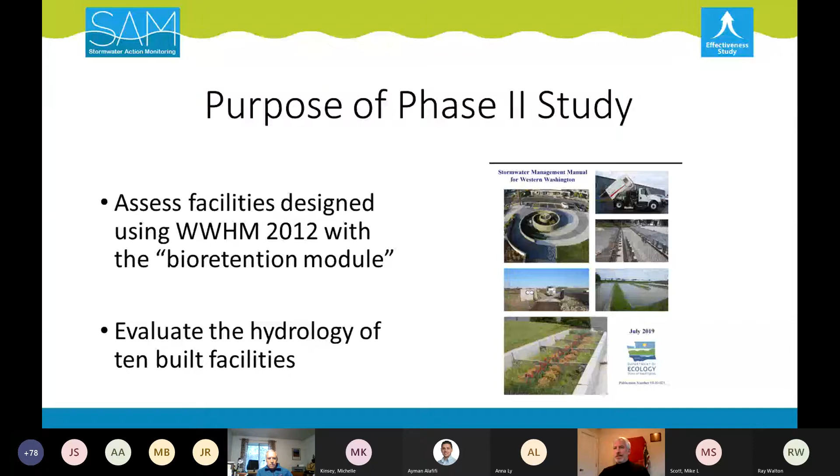The idea was to evaluate the hydrology of 10 built facilities. In other words, how well do constructed bioretention facilities perform compared to their design models? Many of you, I'm sure, are intimately involved in designing and modeling these facilities. And what conditions may be causing differences between the actual performance and model performance?

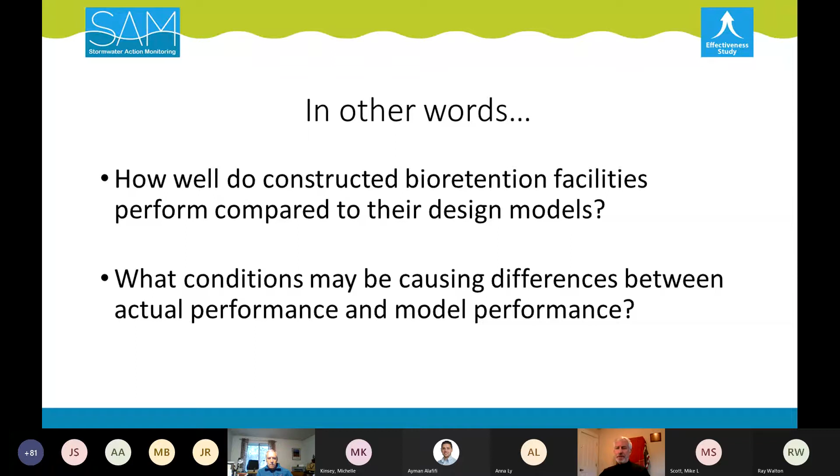As Phase 2 might suggest, there was a Phase 1. The first 10 in Phase 1 were not designed with WWHM2012, so they didn't use the bioretention module, and they were generally older. The second 10 were in fact designed with 2012, and of course were only recently built.

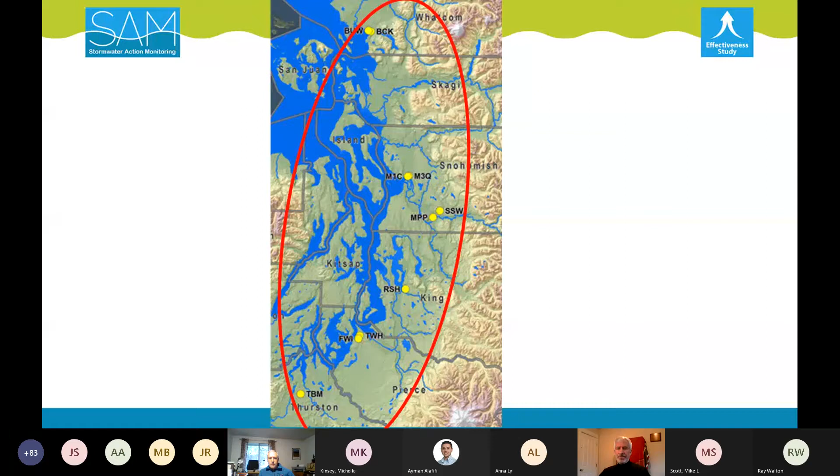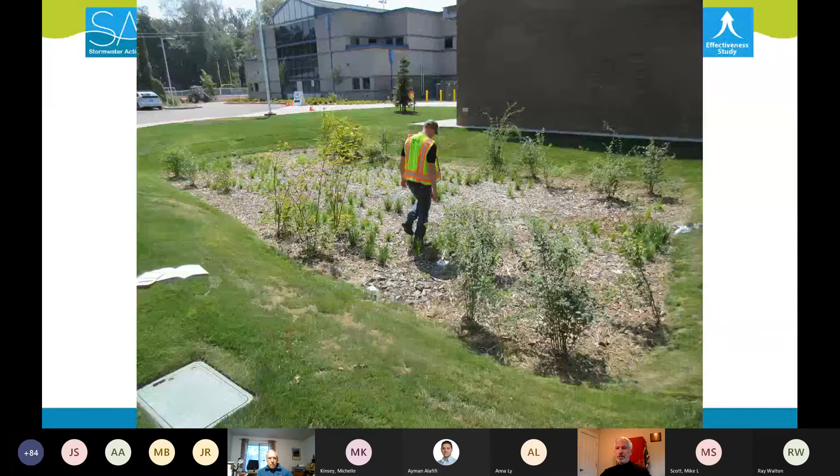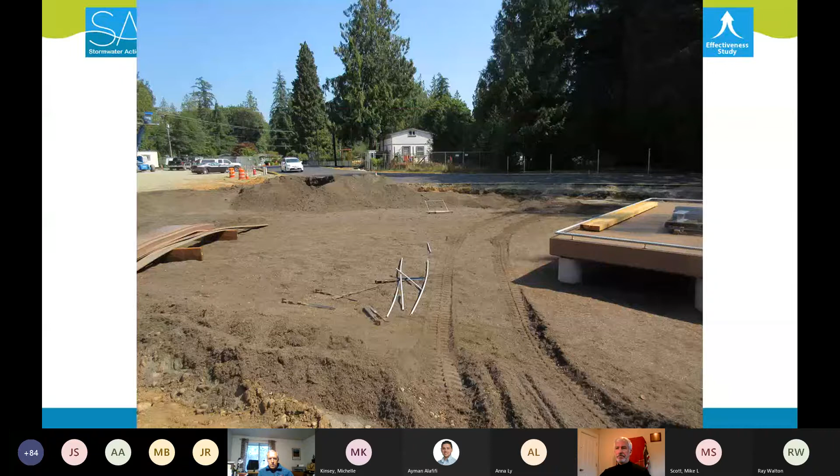There's one in Marysville that was unique in that behind it, adjacent to it, was tidal channels beyond the cyclone fencing there, and the groundwater monitoring saw some fluctuation as a result of that tidal influence, but it did not affect the infiltration performance.

We assessed the various parts of the system: facility dimensions, bioretention soil and subsurface composition, did infiltration tests, measured the hydrology, and categorized the vegetation between herbaceous and shrub composition. These are all the parts that come together to affect the performance.

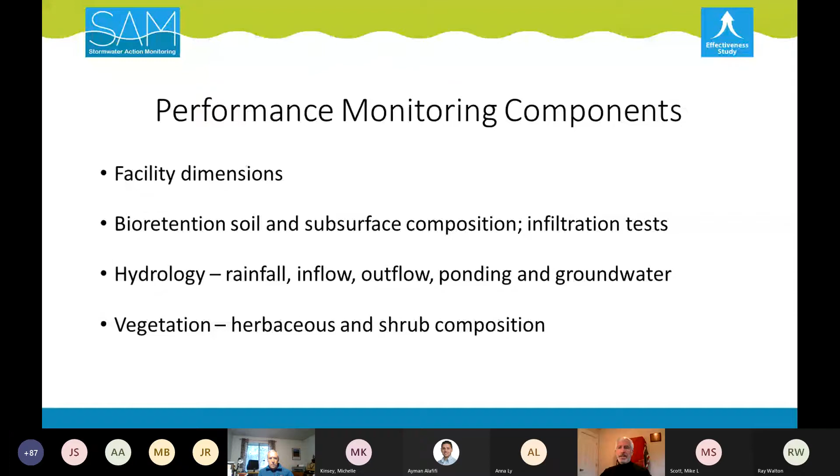Our findings with the dimensions were that 3 facilities had smaller bioretention areas than reported, and 6 of the facilities had a very small ratio of bioretention area to drainage area.

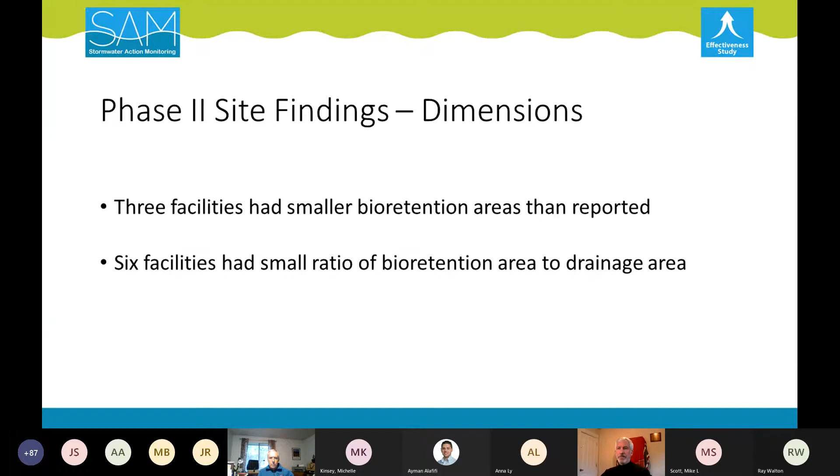Also, for the ratio of bioretention area to basin area, the number of them were small, and granted, a number of those that were small were in fact retrofits with some latitude in the design, that these facilities did not meet the rule of thumb of 5% of the drainage area. But again, that's a rule of thumb, and each situation needs to be assessed individually.

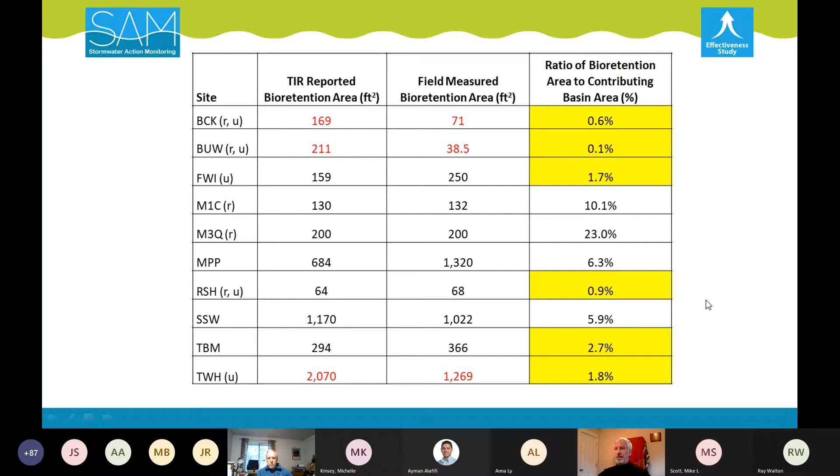Here's the hydrogeologic and geotechnical findings, really covered a wide range of conditions. The bioretention soil texture was generally coarser than the guidelines, and there's a wide range of infiltration rates. And the localized information about the facility hydrogeologic conditions often were not site-specific right where the facility was going to be placed.

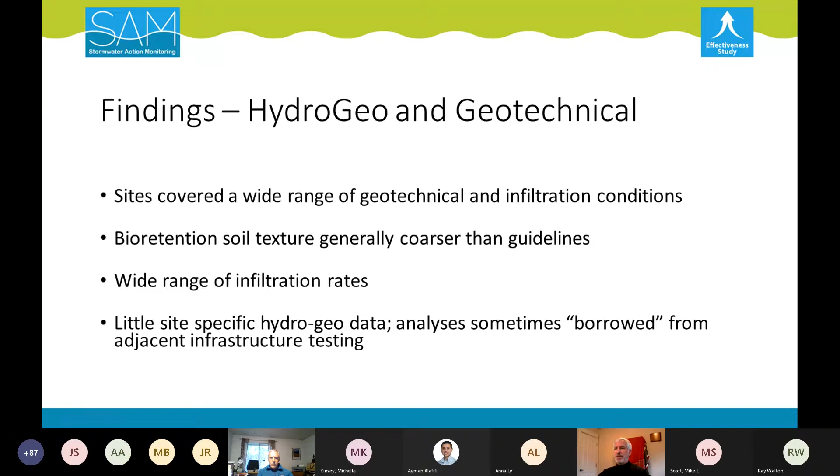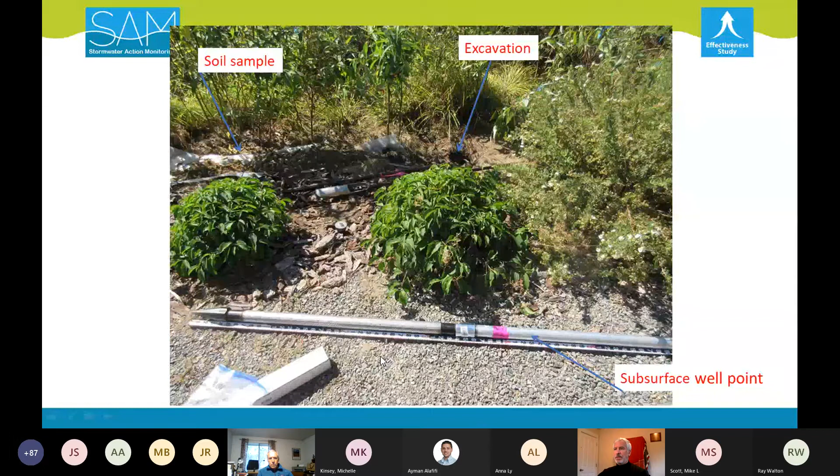Here's an example of how we sampled the soil and the native soil underneath, collecting the soil for a sample, and then placing the well point in the hole with the stage recorder to monitor the groundwater fluctuations.

Here's the result of the media composition, and you're probably familiar with this grain size distribution with the recommended grain size envelope in the dashed area, and each of the sites distribution of the BSM. It's really indicating, this was the first set, that the fines were less than what was recommended in the envelope. Those fines affect the spaces in between larger particle sizes to pass the water through, and so this smaller size greatly affects the infiltration rate.

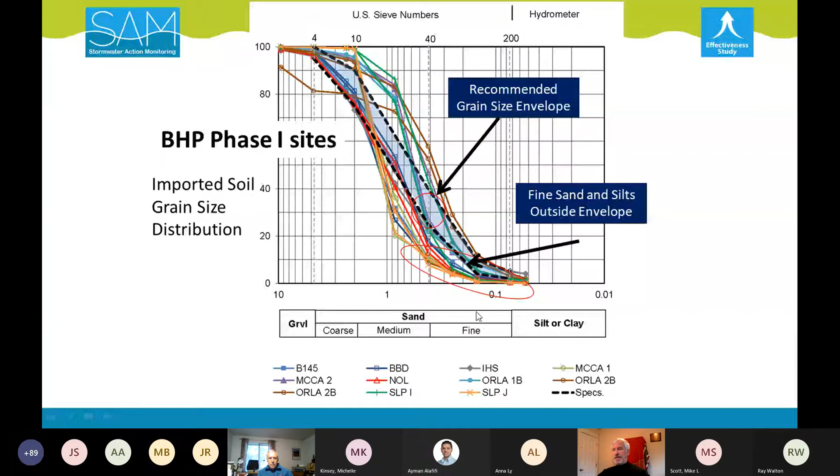Here's the same results from the second set. There were more sites with fine sands and silts within the envelope, but still some not.

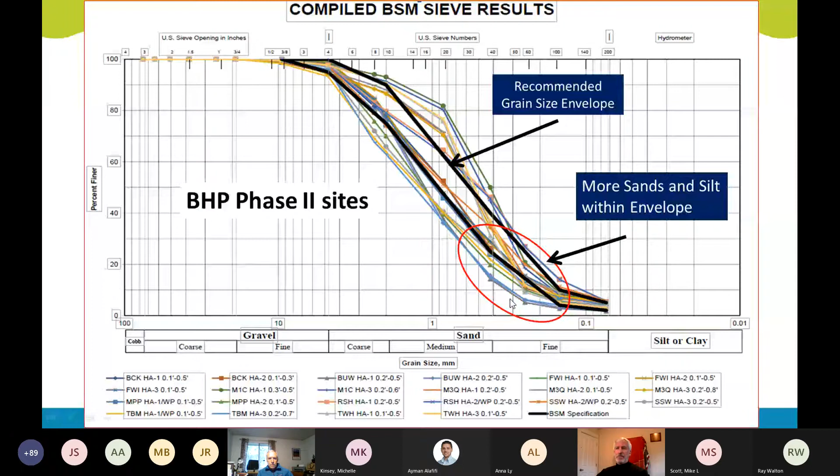And here's how we got the bioretention contact area in the flood test, the full flood test. While the facility is flooding, Jenny and her hydrogeologists are able to calculate, or actually measure, the actual observed bioretention area in the facility.

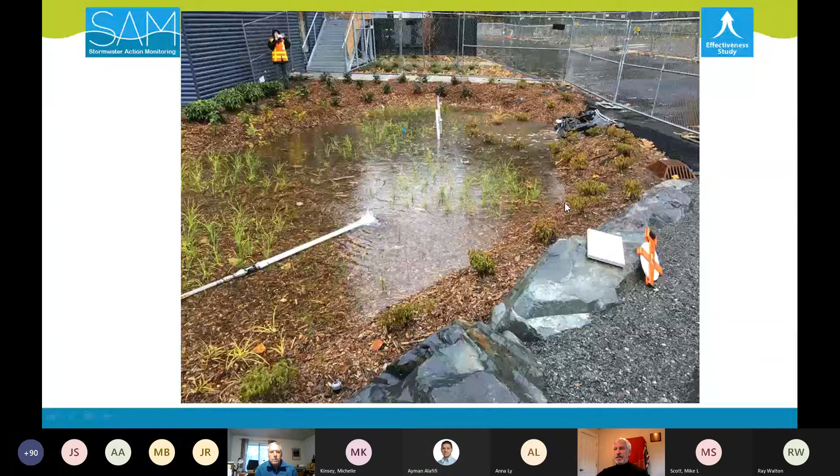Here's another example. The previous one had a grate for the overflow, and the bioretention area would be up to the elevation of the grate. Here's another one that did not have a grate overflow, but actually the edge of the facility, the low point, represented the overflow that allowed any overflow to go out into this field.

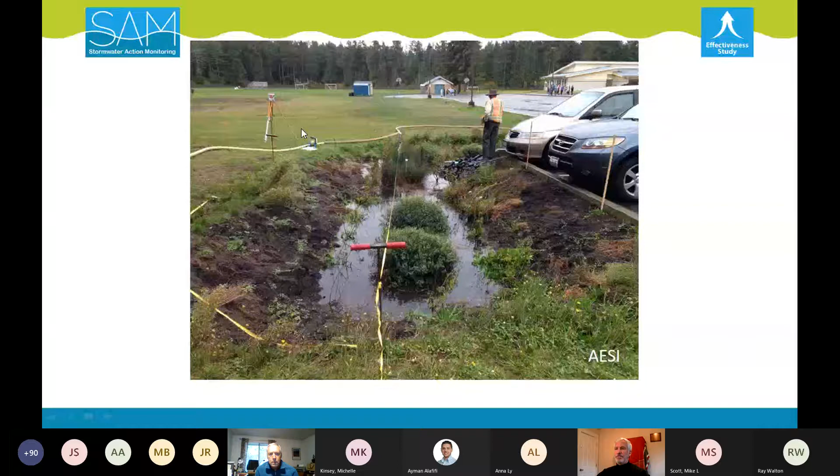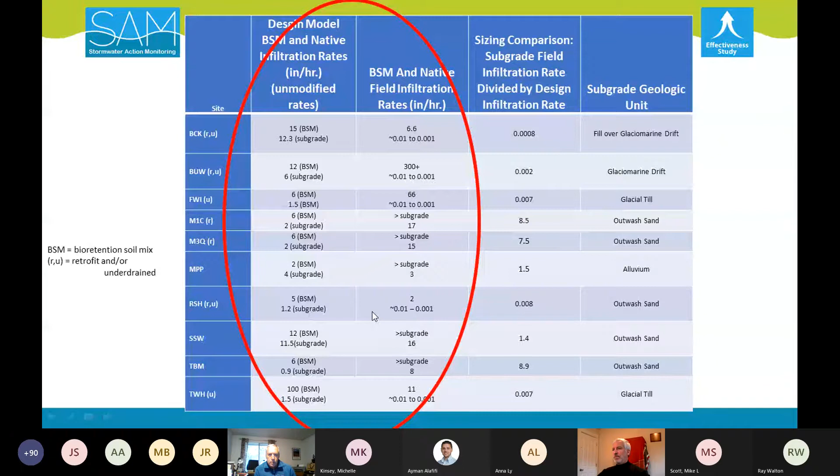With the plants, this turned out to be very informative to do these plant assessments.

Does somebody have a question?

Anne really discovered that the cells were mostly planted with plants that grow in wetland or wet conditions, when in fact the units are incredibly well draining. They should be planted with more dry tolerant plants that can tolerate brief inundations of water, but not if the unit is located on a site that could set water up in the feet of the plant roots.

But this was a common observation in the first set and in the second set, which has considerable ramifications on maintenance going forward for the owners.

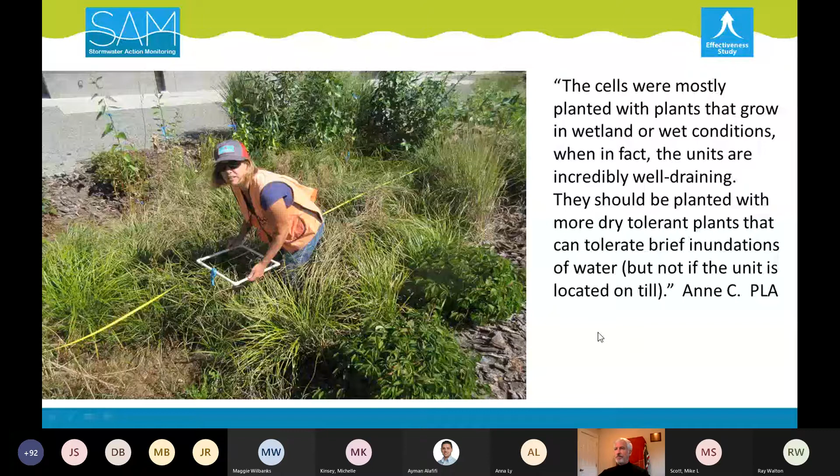So in the vegetation findings, the shrubs did well, herbaceous species less so, and selecting fewer, more successful species will lead to greater survival. There is a recurring issue of plant die-off.

Most interestingly, both for the plants and for hydrologic performance, there was evidence of uneven infiltration resulting in uneven moisture available to the plantings. What we mean by uneven infiltration is that because the infiltration rate of most of these BSMs is fairly high, the infiltration largely happened near the inflows of the facilities, and in some cases rarely, if ever, reached the other end of the facility, with effects on survivability, but also potential bypassing of the distributed infiltration straight to an underdrain. This was one of the more interesting observations we had in both the first 10 and the second 10.

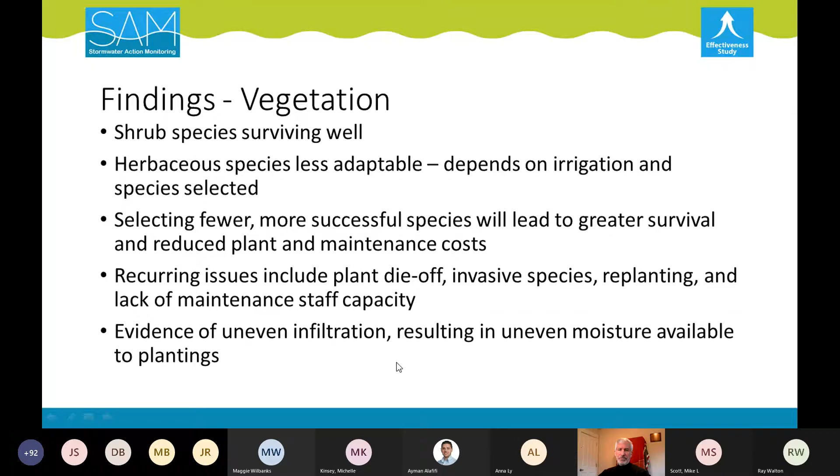Doug is going to be talking about the hydrologic performance. You all know that it's meant to control flow and gain water quality benefits, but needs to be set up correctly.

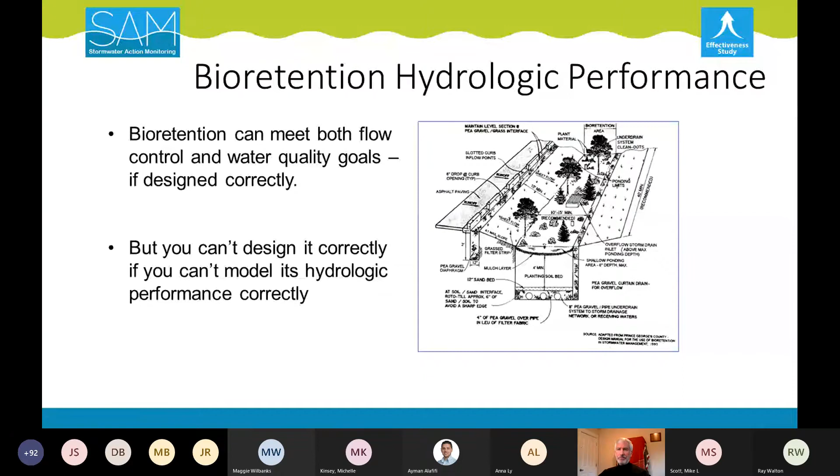In the first 10, there were, without the bioretention module, a number of models used, and it's often not set up properly. In the first 10, the performance of the modeling really was masked by just the size of the facilities, masking design errors or incorrect assumptions.

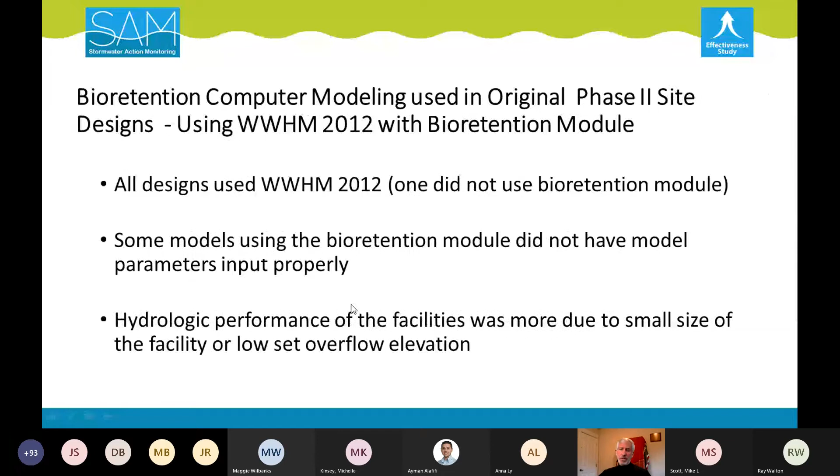The second set, 2012, was used, but in one case the bioretention module for some reason was not. Again, models using the bioretention module did not have model parameters input properly in a number of cases. The hydrologic performance of the facilities was more due to the small size of the facilities or low overflow elevations.

Interestingly, in the first set of 10, none of the facilities overflowed. In the second set of 10, 4 of the facilities overflowed, and each of those were underdrained, which would seem a little counterintuitive, but they were also small or they had low overflow elevations.

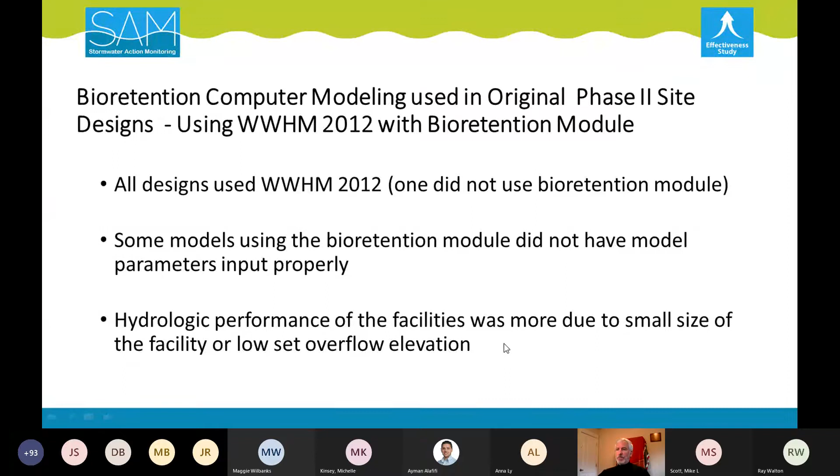For the most part, the model represented what we actually measured in the field quite well. Doug is recommending to ecology that maybe a vegetative litter layer and also increased evaporation rate could improve the performance of the model.

And here's the take home, the simple design recommendations that I think each of you in this engineering audience will really recognize: maintaining a bioretention top area of at least 5%. Again, that's very site specific, and take that with a grain of salt, that kind of rule of thumb is, but we did see a number of the smaller facilities overflowing. Maintain a minimum 6-inch riser height.

One of the facilities had a riser height of about 1 inch, and of course that doesn't gain you very much infiltration area.

Make sure to meet the bioretention soil mix depth and particle size distribution. Again, importantly, specify a planting plan that reflects the relatively dry and well-drained conditions of bioretention facilities, and double check the accuracy and consistency of your bioretention soil media infiltration and native infiltration rates and the associated correction factors. Those are going to have the greatest effect on your model outcomes.

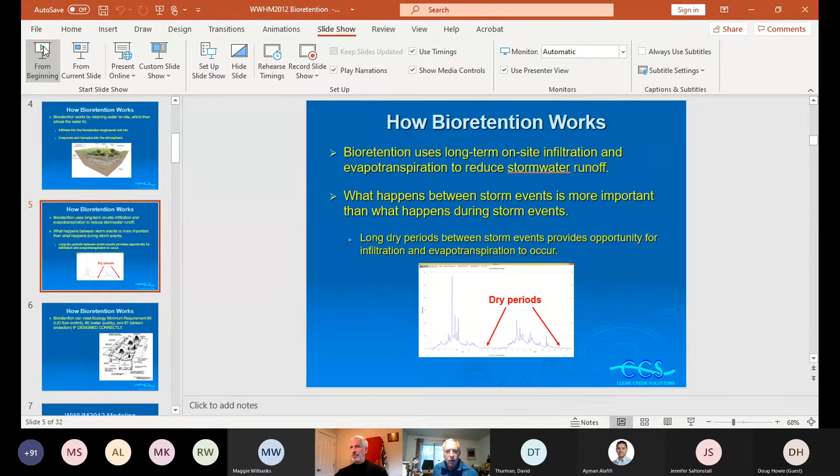Hey Doug, this is Jenny, you're not sharing the presentation. Oh, we're not? Okay, let's see if I can figure out why not. Let me go back here and see what I need to do. So I shared my screen but it didn't come across. Are you sharing your PowerPoint or just that desktop? Well, I thought I was sharing my PowerPoint. So you're not seeing that? Now we are, you're seeing it now? Yep, now we see it. Okay, but it's not on slideshow mode. No, I'm just going to go over to that now. So let me switch back over here. Are we good now? Yes, perfect. Okay, well, I'm glad somebody finally mentioned it. Otherwise I would have continued on my way.

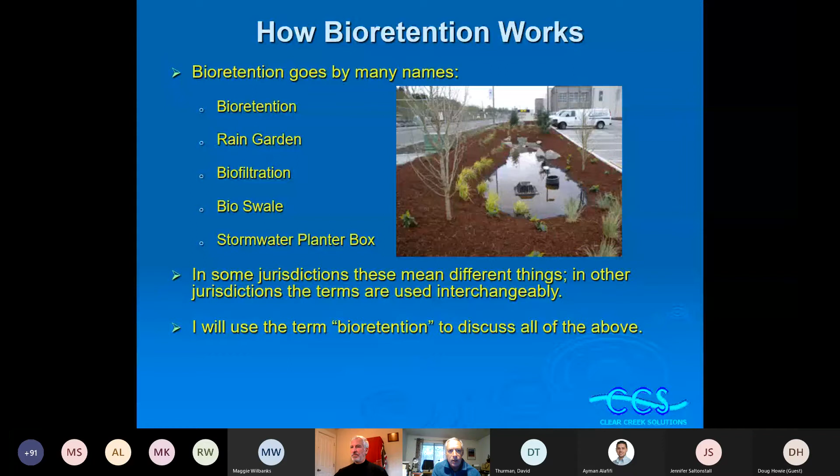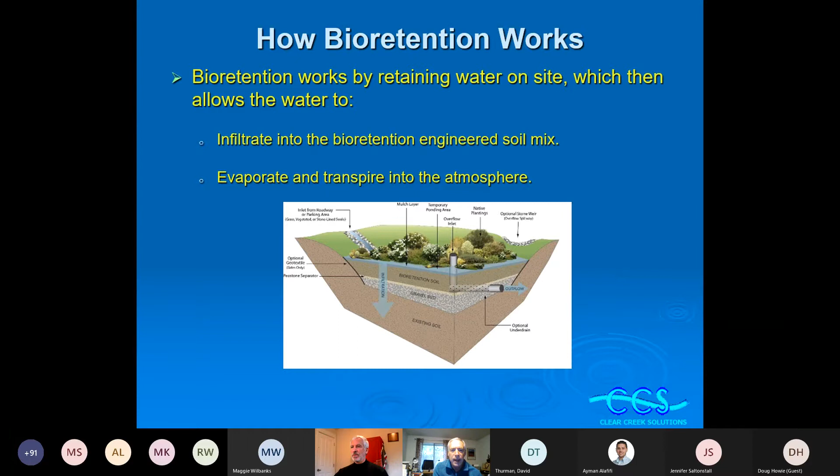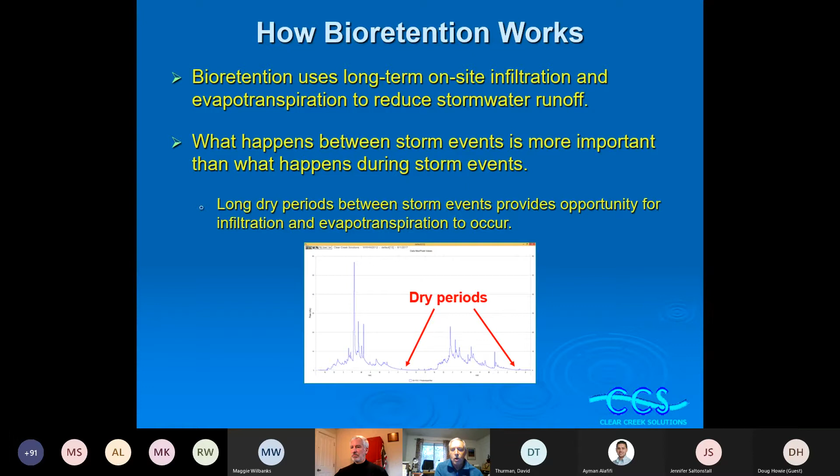So these are the different names for bioretention, just to summarize. Ecology, like I said, has a specific definition of what bioretention is, as opposed to a rain garden. And the water obviously has a variety of options when it gets into a bioretention facility—it can either infiltrate into the soil, go back to the atmosphere, or run off. This is where these dry periods allow water to both infiltrate into the native soil if possible, or go back to the atmosphere through evapotranspiration.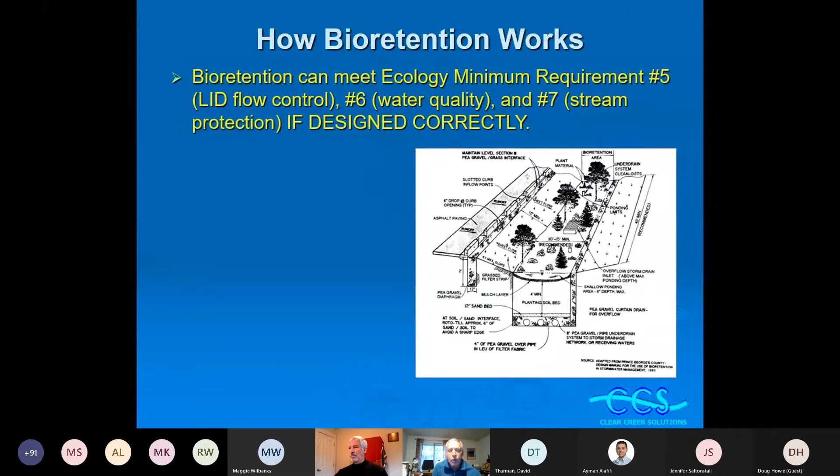So we can do a number of things with bioretention. Ecology has a number of requirements when it comes to stormwater. Minimum requirement number 5 is related to LID facilities and flow control, 6 is water quality, and 7 is stream protection. So you can use bioretention to meet either 1, 2, or all 3 of these requirements, if that is your goal.

Now, the way it works in the model in WWHM is it uses HSPF, which is continuous simulation hydrology. So the Western Washington Hydrology Model is a package that allows the user to easily use HSPF. This means we can model the entire hydrologic cycle over multiple years at a 15-minute time step, and this is what we're doing here with our bioretention facilities. When we did the actual monitoring, we monitored them at a 5-minute time step. We only had about 9 months worth of data, but we were still able to basically model them at that time step, so we have that flexibility.

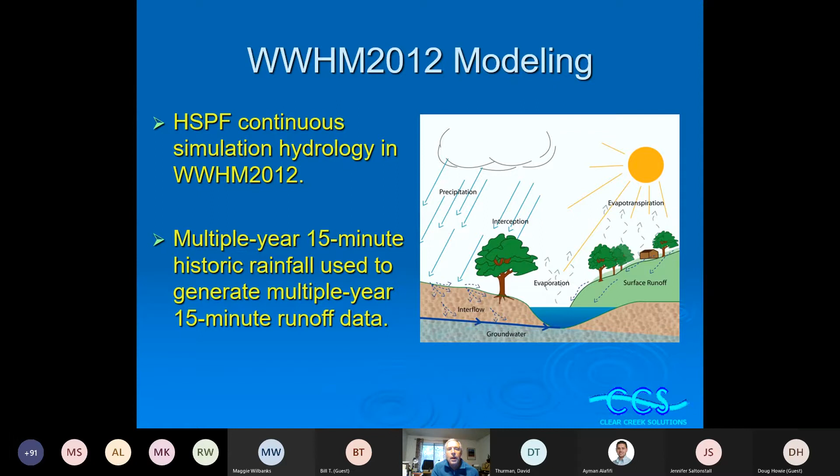And that means that we can basically watch where the water goes through the whole hydrologic cycle.

You have rain on the facility, flow coming in, surface ponding, and you can have surface runoff, and then the water can go through the different layers. We have up to 3 different layers, which can represent the bioretention soil mix, a gravel layer underneath that, and whatever else you may want to have.

You don't have to have 3 layers - you can certainly have less. You have the option of having an underdrain, and you also have the option of having infiltration into the native soil underneath. Now the water's got to go somewhere, so if it can't infiltrate into the native soil, you have to have an underdrain to get rid of it. If you do have infiltration into the native soil, you can still have an underdrain if you want.

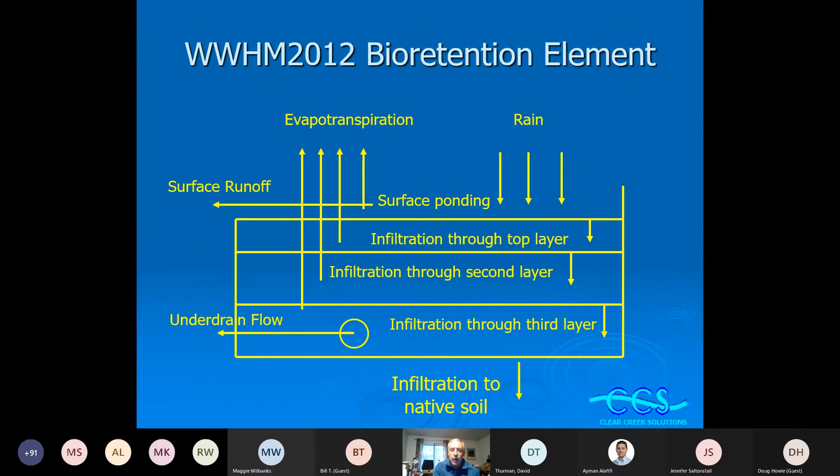So there's a couple things to be aware of. The bioretention area in the model automatically gets rain and evapotranspiration on that surface area, so you don't want to include that area in your drainage that is contributing to it. Ecology has a very specific soil mix layer that is required, and that's set up in the software so that you can do that.

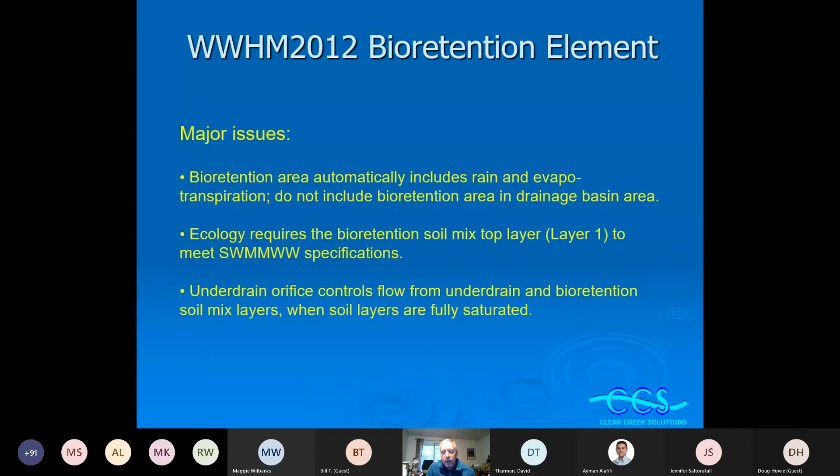And as I mentioned, the underdrain is an option, and if you do have an underdrain, you have the ability to put an orifice control on it to basically control how much of that water, and how quickly it comes out from the underdrain.

This is basically to account for the fact that over the entire life of the facility - let's say you've got a 50-year life for this facility - in time you have the potential for clogging on the surface, which is going to reduce the infiltration rate. So this is a policy decision that the Department of Ecology made in terms of how to deal with that situation.

Now, when it comes to bioretention performance, there's a number of critical factors. I'm just going to quickly go through these. Surface ponding is one. Obviously, if the water coming in can sit on the surface without automatically draining off, you have the ability to store some water, giving it more time to go down through the soil and then out either through an underdrain or to the native soil.

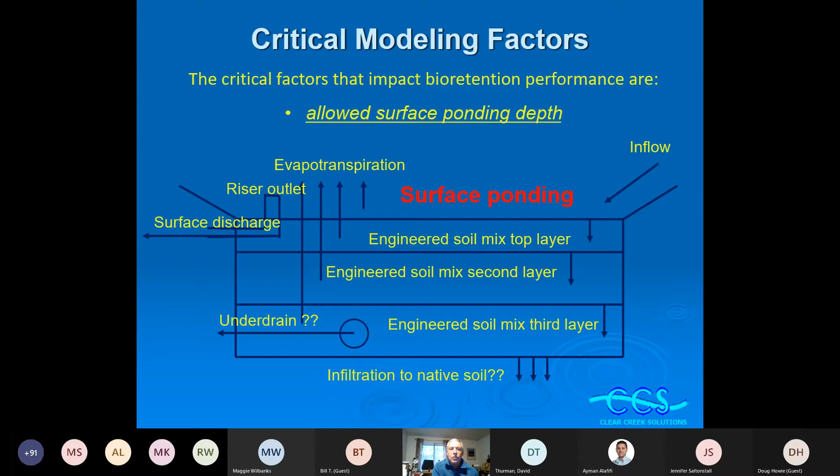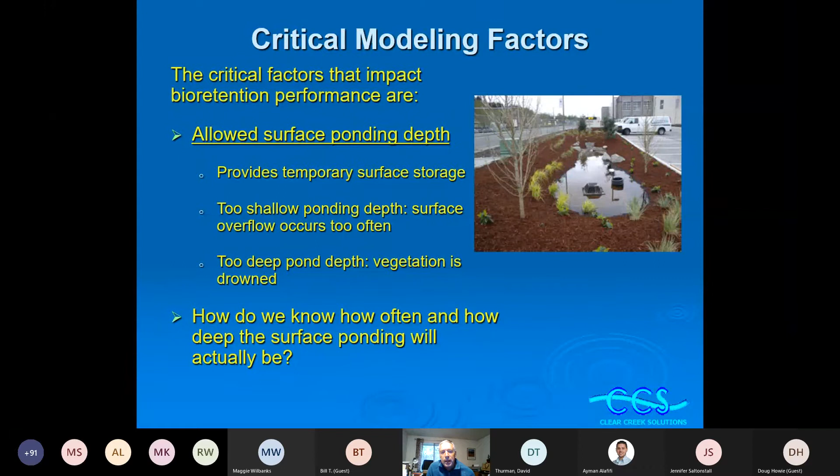So this is where, as Bill was saying, having a 6-inch height of your riser, meaning you can get 6 inches of surface ponding before you actually get surface runoff, is a benefit and something you should keep in mind. If you only have 1 inch, then you're not going to get nearly as much ponding. Surface ponding gives you some temporary surface storage, and obviously you want some storage, but you don't want too much ponding because you don't want to drown out your vegetation. So that's a key consideration.

Another consideration is what type of soil mix you have. Ecology has specific rules for that top layer, which is 18 inches of the bioretention soil mix that Bill mentioned. Below that, you can have a second or third layer, oftentimes a gravel layer underneath, which is primarily used for storage. The user has the ability to specify exactly what these layers are - we give you a lot of flexibility there. The goal is basically to use that engineered soil mix to provide the water quality treatment.

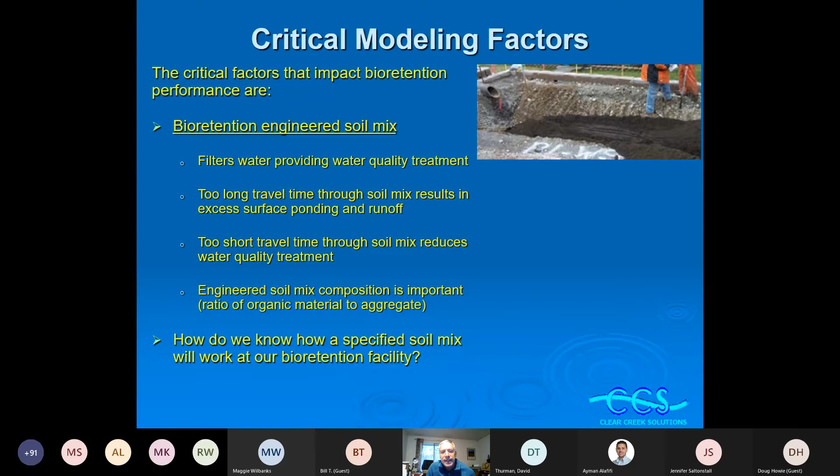So you don't want a mix that prevents the water from draining quickly enough, because then you're going to get more surface ponding and surface runoff. But if it just drains right through like it would through gravel, then you don't get the water quality treatment that you're looking for.

Once the water gets down into that soil, it has to go somewhere. So you have the option of having an underdrain, and if you have one, the water has the ability to exit the soil through that direction. That's a key component.

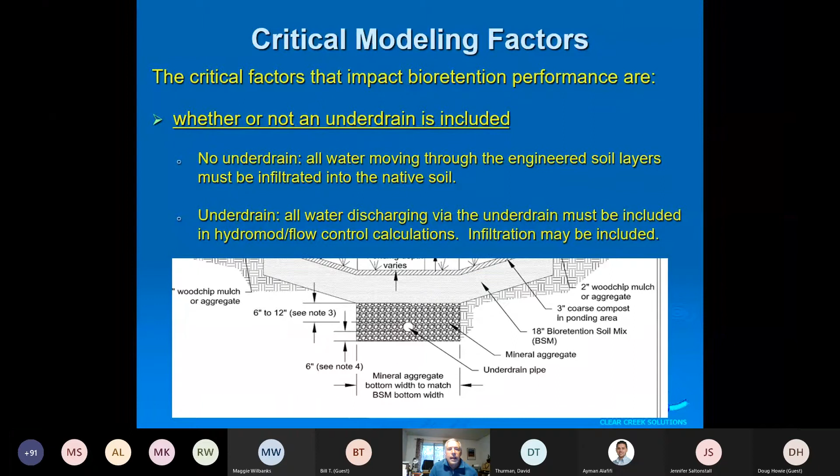There are a couple things you need to take into account in terms of how you place the underdrain, and how quickly that water can be discharged from it. We give you the option of setting the underdrain height to whatever height you want above the bottom of that soil layer, and also whether or not you want an orifice that controls the discharge from that underdrain.

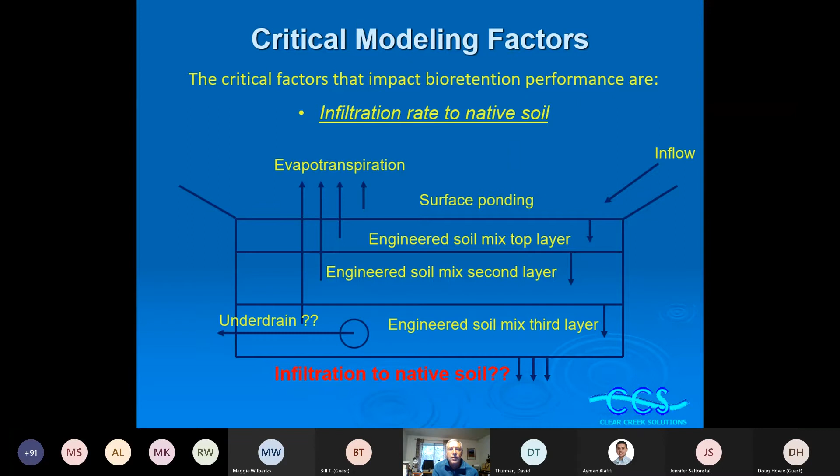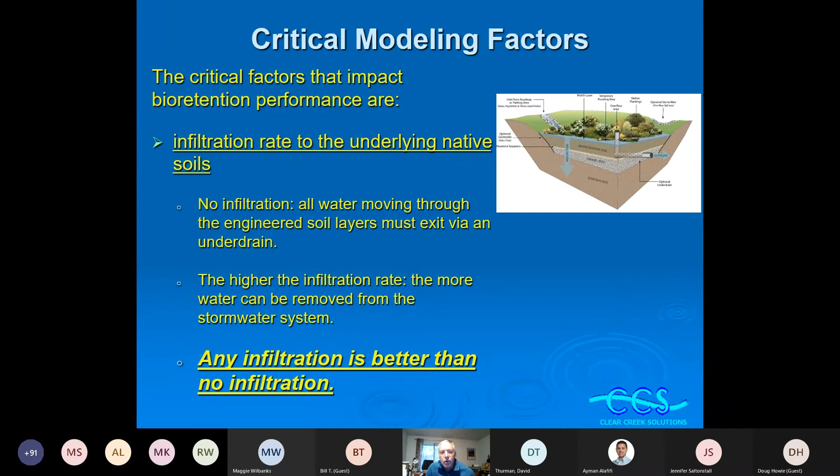And finally, the infiltration into the native soil. If you have the ability to infiltrate into the native soil and it's not going to cause problems, that is certainly a good option, and that depends upon what type of soil you have down there, but it's worth considering and will make a big difference in how well your facility functions. The bottom line is that water has to go somewhere, and if you can infiltrate the native soil, so much the better.

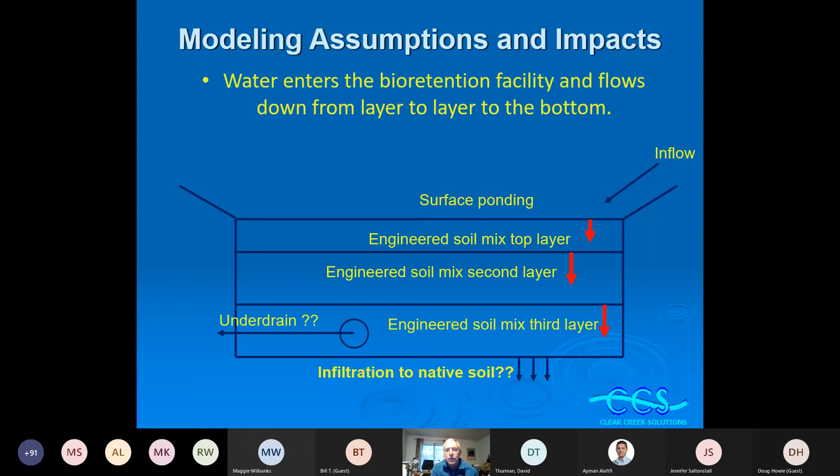In terms of actually how we do the modeling, we do it from a top-down approach. This is all internal in the calculations, you don't have to deal with any of this detail, but just to give you an idea, when the water first is applied onto the soil, we do the calculations based upon the properties of the different layers. Depending upon those properties, the water can move either quickly or slowly through that soil, first into the top layer, then the second layer, and then on down, eventually getting to where it can go out through an underdrain or to the native soil.

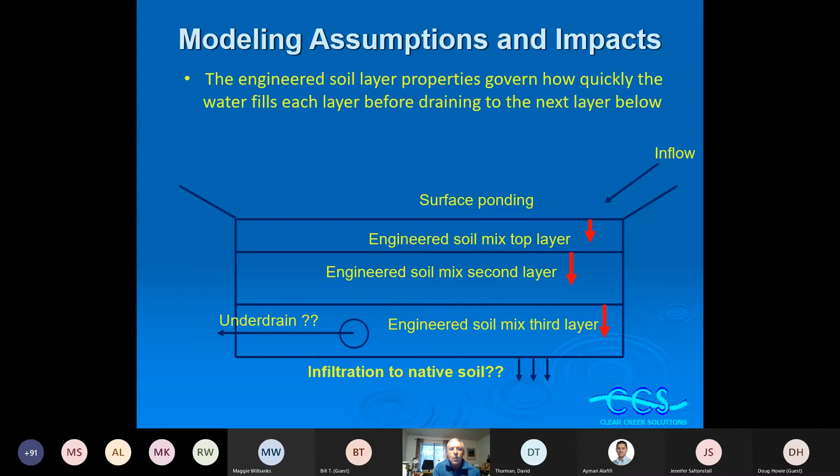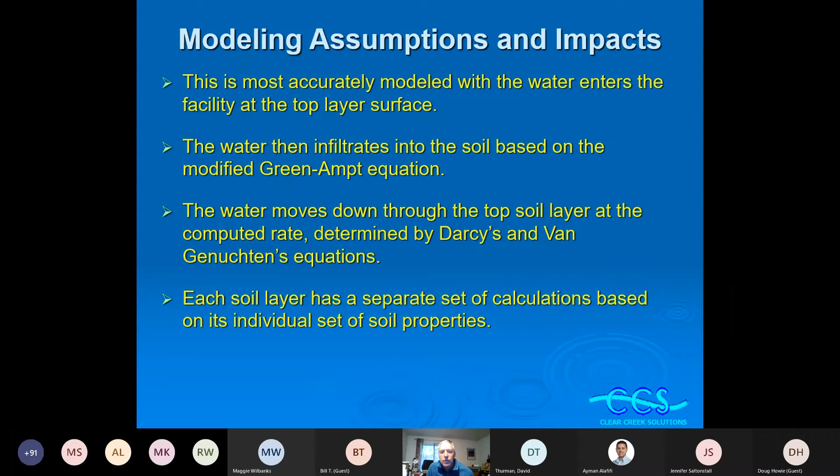So they govern how quickly that water can then move. This is all calculated internally in WWHM based on the Green-Ampt equation, and also using Darcy's and the Van Genuchten equations. Each soil layer has its own separate set of calculations based upon its individual set of soil properties.

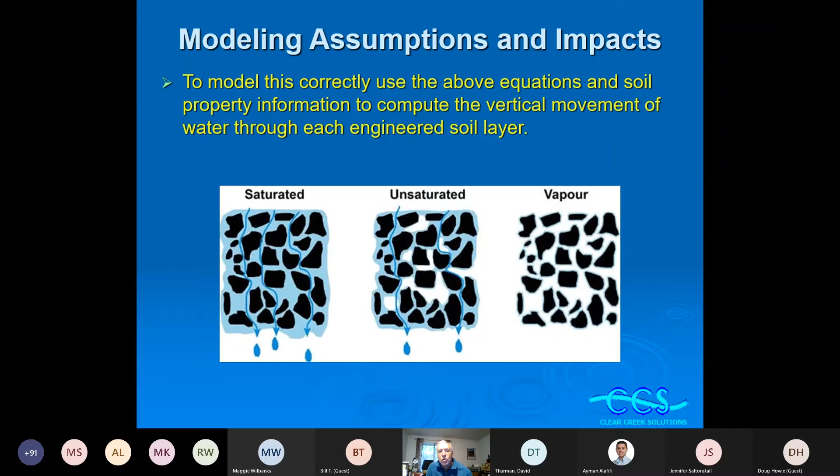What happens in the real world is that when you don't have any water in that soil, you have that vapor condition where basically you have a lot of void space. That's the first place that water will fill up. As it does fill up, eventually when it gets to the saturated point, that's where you actually get water draining from one soil layer to the next. So what we're doing is calculating how quickly that occurs, based upon the type of soil mix that you have and the depth.

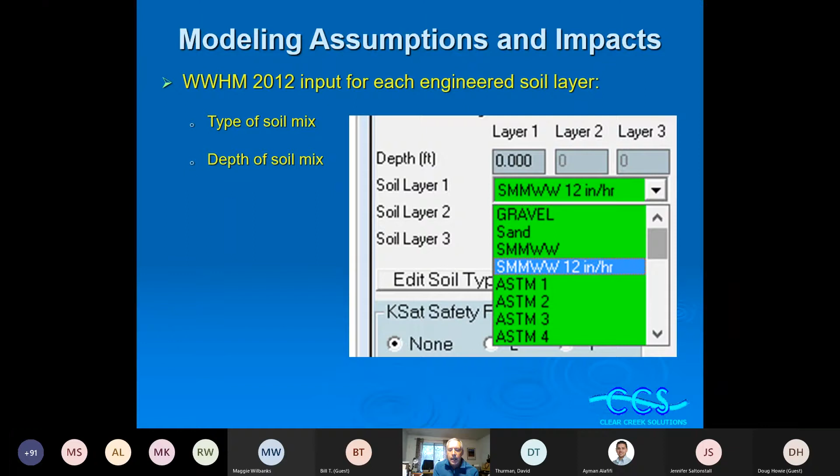So we have this standard here, SMMWW - the soil mix for the Stormwater Manual for Western Washington, which is 12 inch per hour standard. That is what you should be using for that top layer. But we have a variety of different soil mixes available that you can pick for the other layers also. These are the parameters that go with each of the soil mixes.

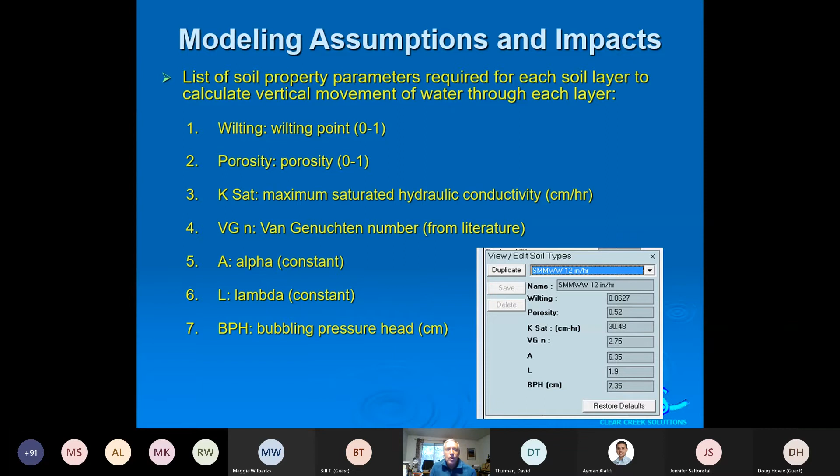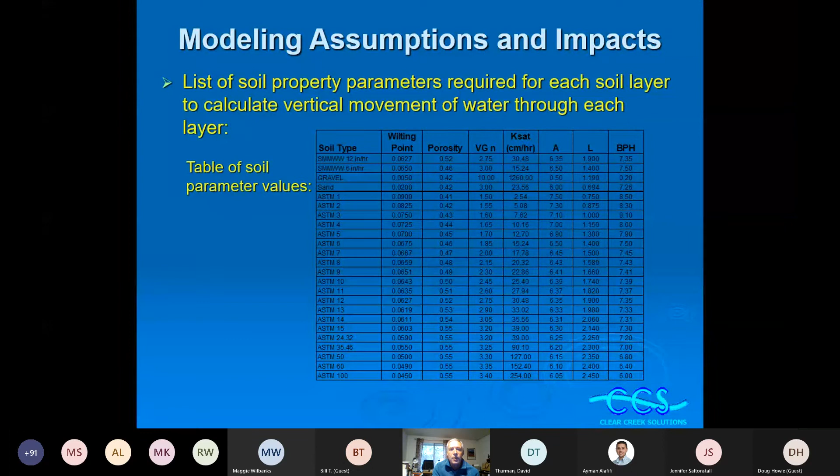You don't have to know all this information, but this is what's in the model. Here's a table we use to basically determine what the parameter values are. All this information is available if you want to use it, it's there for you. You can create your own soil mix also, but you just need to have the parameter values for these different parameters. So it's a little bit of work.

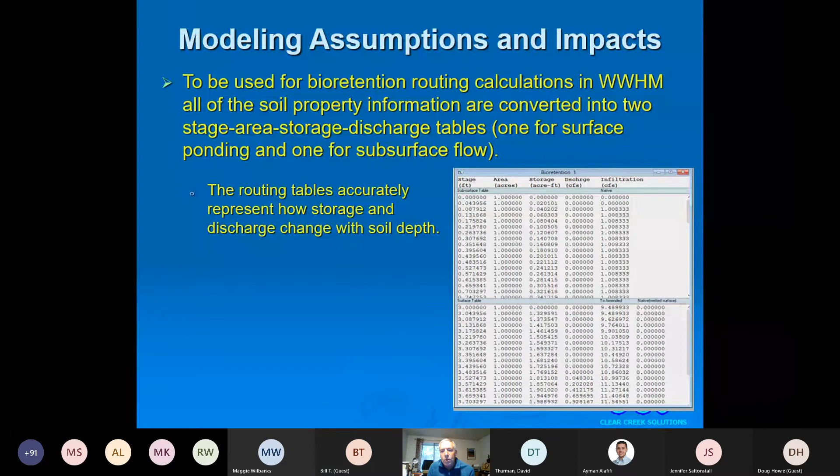But the bottom line is that when it's all said and done, and this is all calculated for you, it comes up with what we call a stage storage discharge table, or in HSPF, what would be called an F table. We have one for that surface ponding and one for the subsurface layer. This is how internally in WWHM the water is modeled in terms of how it moves through the different soil layers and then can discharge both via surface discharge and through the infiltration process. All these are calculated for you, but you have the ability to change this based upon your input.

So yes, this is Bill. Just a quick question to clarify.

You're saying there are some options to choose from, but really in Western Washington, to be in compliance with the Stormwater Management Manual, the main first step is selecting the SMMWW 12 soil, and a K saturation value of either 2 or 4, and there's really not much flexibility around that? That is correct. I mean, that's based upon ecology standards, but you can have additional layers below that of different soil mixes - sand, gravel, whatever you think is appropriate. So you have that option.

That initial BSM is kind of the treatment layer they're really wanting to apply to that first infiltration and water quality treatment. And that KSAT saturation value is to take into account the theory, or expectation, that there is clogging over time.

I'll weigh in that there's maybe some debate about what degree that clogging may be. We had the City of Seattle green stormwater infrastructure lead saying that they're finding that with aging, the infiltration rate sustains itself or actually increases.

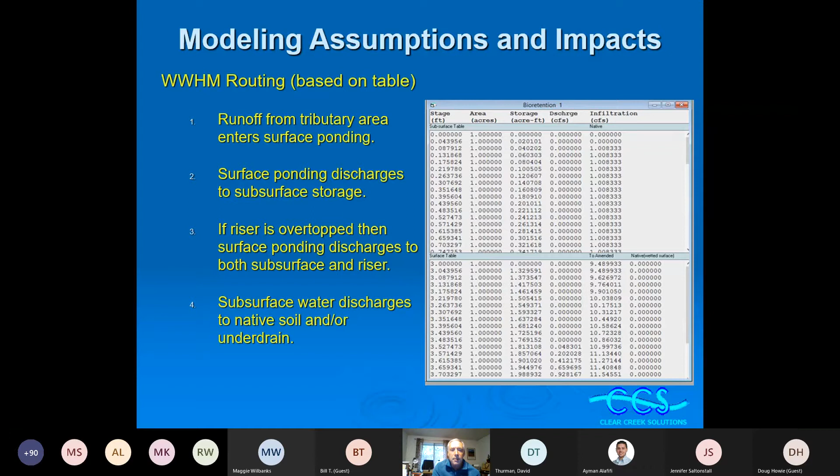Basically, this is the end result here in terms of how the actual routing is done through the bioretention facility. This allows for discharge through surface ponding and also through infiltration into the native soil and out through an underdrain if one's available. So we give you all that flexibility, and it's just a matter of inputting the appropriate and hopefully correct input to generate the correct output from the model.

So basically we did this, and this was all based upon those 10 sites that Bill mentioned earlier, and we compared our results with what we measured out there in the real world. There were obviously some differences, but in general we were able to reproduce what we saw out there, and we have all the details in our report.

So if you want to see graph after graph of this sort of information, it's all available in the report we're finalizing, which will be out at the end of the month or early next year. So basically, as Bill said, these are the key considerations when you're setting up your bioretention area in your model.

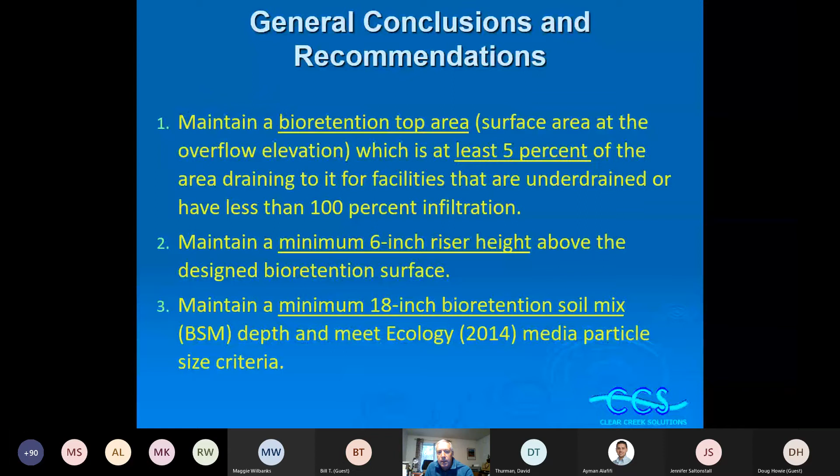5% is a good rule of thumb, 6-inch riser height, and 18 inches of the Ecology bioretention soil mix. Do those things and you really can't go too wrong, but those are certainly the key things to consider as you do your modeling. So that is basically the summary of a quick overview of the modeling work.

And if you have questions, here's my contact information. Joe Brascher, who he and I are co-founders at Clear Creek Solutions, he's the real brains behind the Western Washington hydrology model, so if I can't answer your question, I'll pass it on to him. Our contact at the Department of Ecology is Foroozan Labib, and also people like Doug Howie and others there are very knowledgeable on this subject.

So I will finish up there, and we'll open it up if we have any time for questions. I'll be happy to answer them if I can.